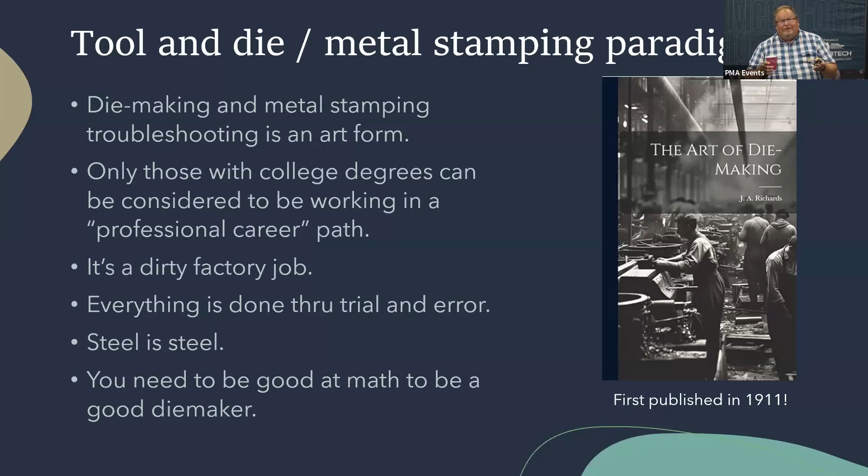It's a different world. The next paradigm: when I tell people I'm a die maker, they say, oh, you must be really good at math. And I go, no, not really — in fact, I'm quite poor at math. I think there's this perception that you've got to be super good with calculus or something to be a die maker. Yeah, of course I can do basic math, I hope. But I really doubt that even Danny Scheffler here has sat down and used a whole lot of calculus recently. But that paradigm is out there.

So here's the reality, not the perception, the reality. Tool and die designing, building, engineering is a science based on physics, based on an understanding of physics. Dr. Stuart Keeler, God rest his soul, made a statement one time at a conference. He said, when sheet metal meets physics, physics always wins. It's hard to defy physics, and he's absolutely right. To be a good tooling designer, engineer, process engineer, or even a good tool and die troubleshooter, you have to have at least fundamental, if not extensive, knowledge of material behavior.

It's not 1911 anymore, where we have 2 grades of steel, low carbon steel and thicker low carbon steel. You have to remember some of these paradigms were brought about as a product of history and tribal knowledge. Back when they made cars originally, they weren't concerned about fuel economy. If a part failed when you hit a tree, they just made it thicker out of the same stuff they made it out of before. They didn't care about mileage. And so all of these rules regarding die design, troubleshooting, were created and passed down from generation to generation to generation. Unfortunately, a lot of them haven't changed. Case in point, what kind of clearance do you put between the punch and the die when you're cutting?

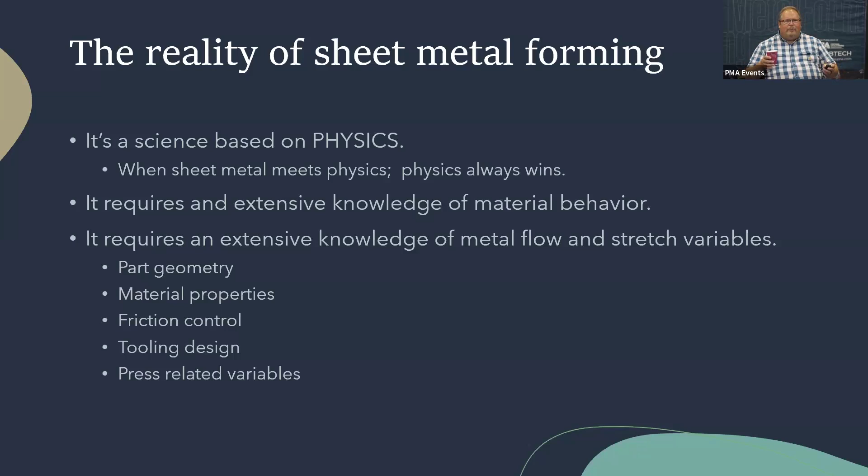It requires an extensive knowledge of metal flow and stretch variables, part geometry. How does part geometry affect formability? How do the material properties affect it? Friction control - we have to understand tribology, which is just the science of friction, if you don't know that. We have to understand tooling design and press related variables, and understand what role the press makes. I love to say, as it pertains to sheet metal stamping, the press is just as important as the die. I can build a jewel of a tool, with an accuracy that's unheard of, but if I put it into a glorified 250-ton trash compactor, I'm going to have issues. So we have to understand the entire stamping system - the material, the press, the feeder, the lubricant, the tool steel type - all of it fits together and everyone's a variable. So we have to have a pretty good understanding of how it all works together.

Very simply, as I've stated, this ain't Kansas anymore, Dorothy. So if you're still using the same stuff that you used 20, 30 years ago, you might want to do a little research and educate yourself regarding how the industry's changed. For example, the Tin Man is no longer made of tin. He's lighter, faster, and stronger than he's ever been. He's made out of high strength, low alloy, 80 XLF, dual phase 1100 material, martensitic steel, some certain grades of bake hardenable body panel aluminum and super alloys.

He's got titanium joints and Inconel inserts in his back. And he's completely crafted differently than he was 30, 40 years ago. He is crafted using lasers and water jets and CNC high-speed machines that do hard cutting. Parts of his body are 3D printed, and the presses that stamp out his arms are high-tech, servo drive, ultra precision presses with parallelism and stroke lengths that are ultra precision. It's not 1911 and it's not an art form. So we have to shift our paradigm and look at it completely different.

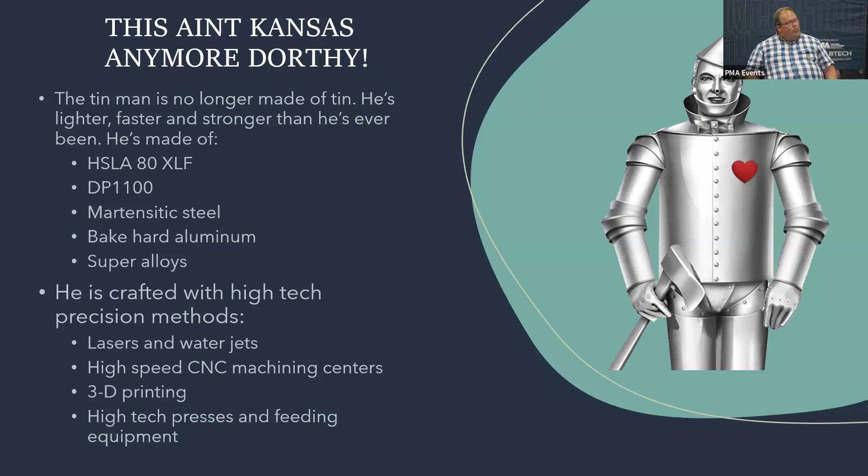And so, we got to look at things a little bit different, and we have to understand that difference. And how do we do that? We shift our paradigm, stop making die makers, stop making die makers and press technicians, and start making diologists.

Now, there is no such thing as a diologist. That's a term I came up with. I named my company Diology because I firmly believe that the process of designing and building a die and stamping process is a science. So I thought diologist was a perfect fit.

What separates a diologist from any other type of tooling specialist? A diologist is an individual that makes decisions based on an understanding of the physical behavior of sheet material and also uses data. I'm not going to make decisions because it worked last time, because that's the way we always do it, or because I had success back in 1984 with a part that looks similar to it. I'm going to make decisions because I understand the physics that supports that decision.

And if I don't understand it, I'm going to try my best to understand. Does that mean a diologist always has the solution based on physics? Heck no. I can't tell you how many times I've stood out by a press, scratching my head, going, I just don't know what's going on here. I think if anybody's honest with themselves, every panelist out here has gone, this one stumped me. But eventually we get there through the application of physics.

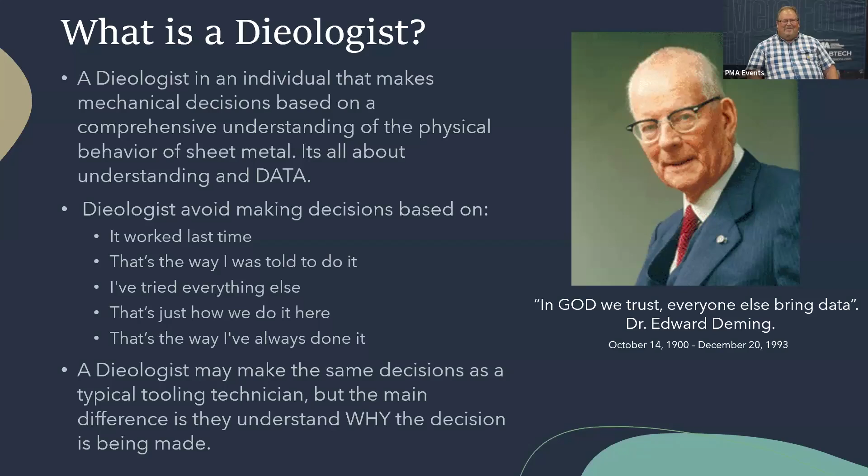So eventually they'd come back and say, okay, I'm going to increase the radius at the entry. It's going to reduce the friction, which will allow more material to feed in, reducing the strain at the top of the part, reducing the probability of splitting. Then I'd smile and say, thank you, knock yourself out. Okay, that's all I wanted.

Okay, so I've only got a short period of time here, and quite honestly my watch stopped working, so I don't even know what time I have here. But I kind of put together some courses that I think are very important to become a diologist, as well as on the floor experience. Okay, number one, shop floor communication and leadership.

I think it's so important that we have an understanding of how to communicate and get people to work together as a team. I rely on different paradigms. Sometimes the solution to a problem is so simple you don't think of it, because you've trained your brain to think at advanced levels, and you don't see something as simple as a rag clamped on the die in the press. So you need people with different levels of experience bringing different ideas and concepts to the table, and then you can come up with a solution.

That's what consulting is. A lot of people think a consultant is somebody that comes into their company and tells them how to fix stuff. Like a blind squirrel that gets an acorn once in a while, sometimes that happens, but more often than not it's a group effort - coming in, getting people together as a team, collecting data, and as a team finding a probable cause or solution for that problem. But it takes a good ability to communicate with individuals and instill passion about what they do. I think it's very, very important.

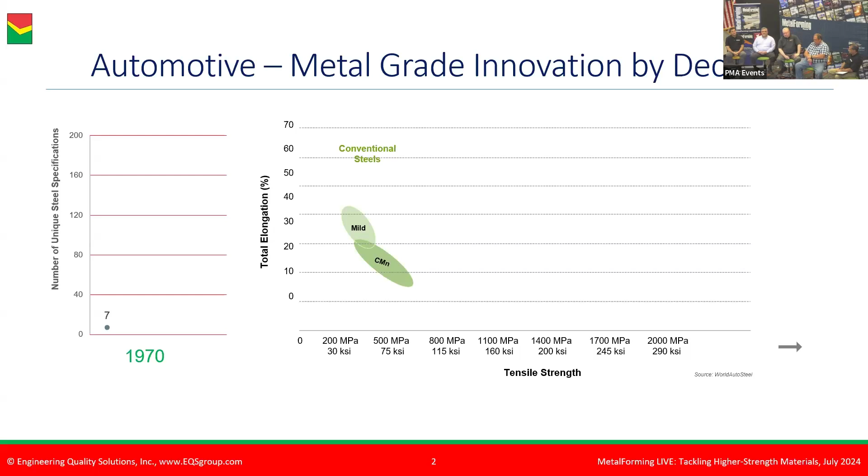Relative to the automotive industry, there were 7 unique sheet metal specifications where these 2 grade families came out of. Fast forward 30 years to the 2000s, where it's not 7 unique automotive sheet steel specifications anymore, but over 100. We have a plethora of new grades in the steel family—that's when the first generation of advanced high strength steels were commercially released. We also saw automotive applications of sheet aluminum alloys as well as stainless alloys.

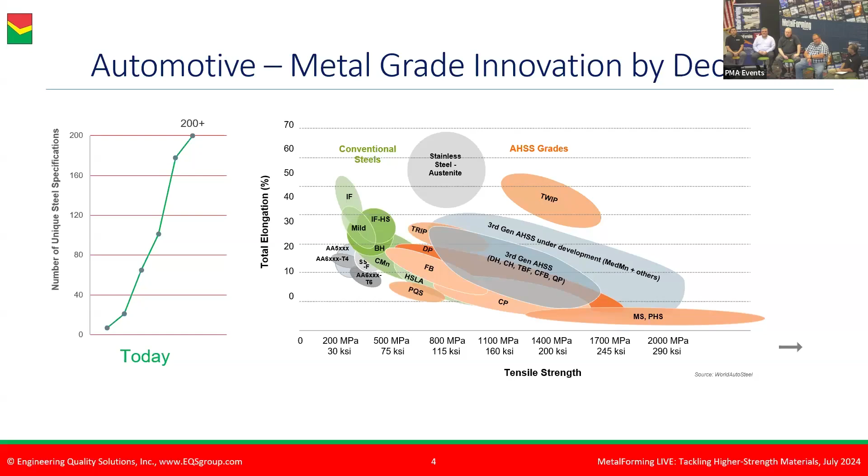What about today? There are over 200 unique sheet steel specifications for the automotive industry alone. We have more than just the first generation of advanced high strength steels—you may have heard we're up to the 3rd generation now. Lots of different options are available to manufacturing companies. But the uniqueness of these advanced high strength steels is that they're no longer basic commodities. They're actually highly engineered products that change in characteristics depending on which company and which location manufactures those products.

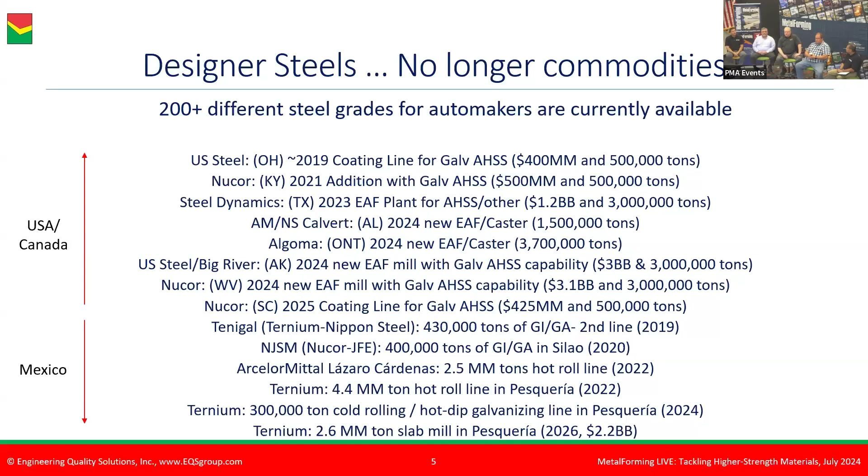These advanced high-strength steels are going to mean some changes to manufacturing processes. Even the most basic advanced high-strength steel that's been commercially available for more than 20 years now, dual phase 600, that's going to take an additional 20–30% of blank holder force. Hopefully you're going to have a way to apply that if you've been sourced on a part made out of this most basic advanced high-strength steel.

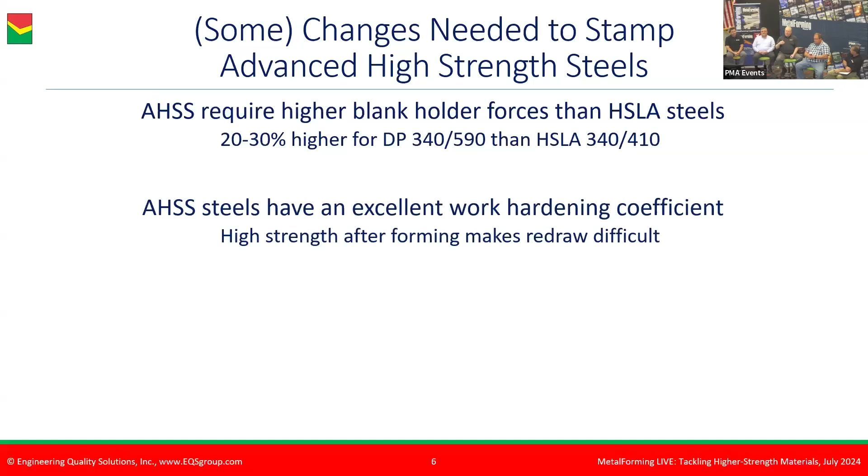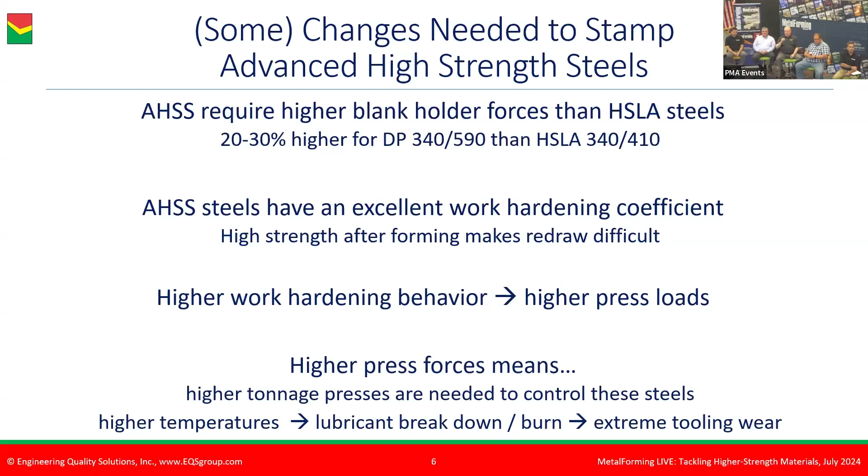One of the characteristics of all of these advanced high-strength steels is that they work harden to a very strong degree, literally and figuratively. That means as you're forming these higher strength products, they become even stronger. That has certain implications, because if you're dealing with a higher strength product that becomes even stronger when you're forming it, you're going to generate increased press loads, which means your press has to have the necessary tonnage capability. But you'll also see additional temperature, even though you're only doing room temperature stamping—these forming processes will increase in temperature, leading to the potential for lubricant burn-off, which increases tool wear.

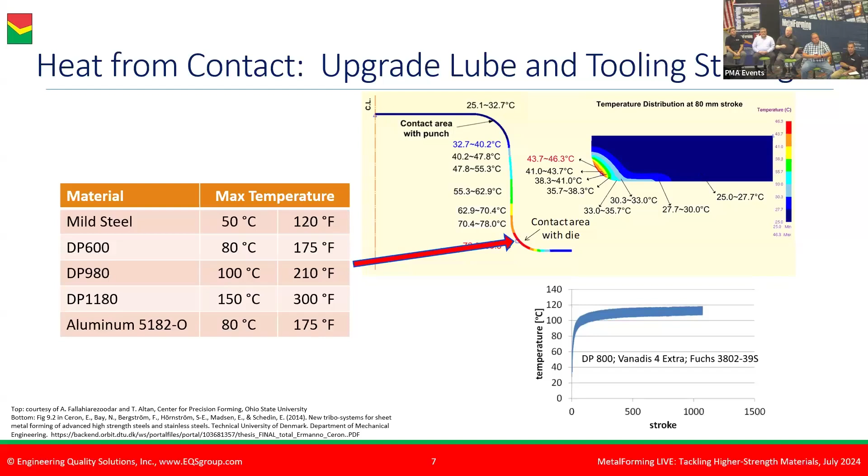As an example, based on a simulation but verified with actual temperature measurements for room temperature stamping, the friction from the contact of sheet metal with the punch and die material, for mild steel, heats up the sheet steel to 120 degrees Fahrenheit. Our lubricants are designed for that. But if we swap in higher and higher strength steels, we're not at 120 degrees Fahrenheit anymore—we're up to potentially 300 degrees Fahrenheit, depending on strength. If you are not using a lubricant designed to have the additives functional at those temperatures, you're going to run into problems with additional tooling wear.

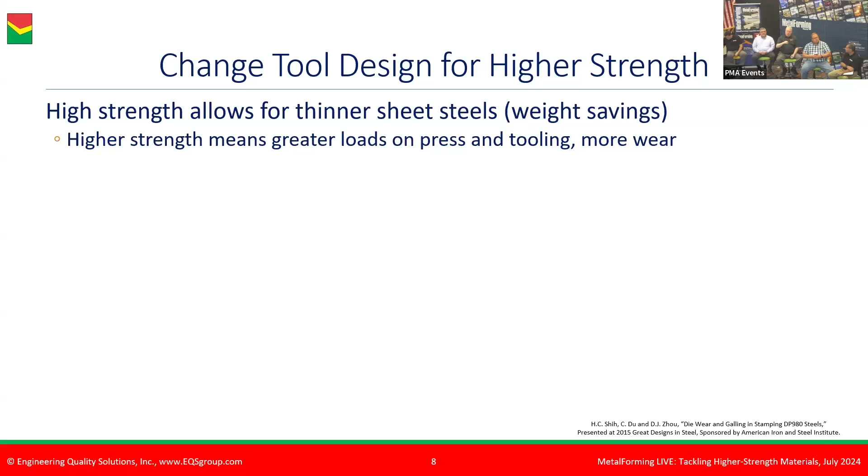So we also need to keep that in mind and change our tool design approach as we start working with higher strength materials—higher strength steels, aluminum, and stainless grades. Those higher strengths allow for a thickness reduction, which is great because that could lead to potential savings. But higher strength means increased press loads and potentially increased tooling wear. Because we're dealing with thinner metals that are now higher in strength, we have a greater risk of tooling wear, since these products are more prone to wrinkling. It's prone to wrinkling because they're thinner, but also we hopefully have enough tonnage to hold it back in the binder.

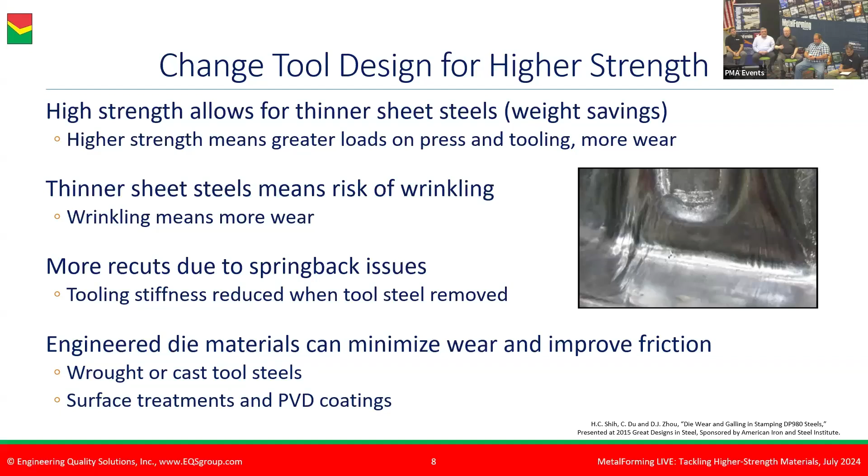One of the challenges with these higher strength steels is an increased degree of spring back. That's certainly the case if you switch to an aluminum product, but also in general, higher strength steels have greater spring back than lower strength steels. That means you have the risk of tooling recuts when trying to do your tooling development to account for that. If we recut these materials too much, we now have the risk of our tool not being sufficiently stiff, so we need to account for that. The tooling material we use needs to be upgraded from our older strategy when considering that we're now dealing with higher strength metals, and the products are out there.

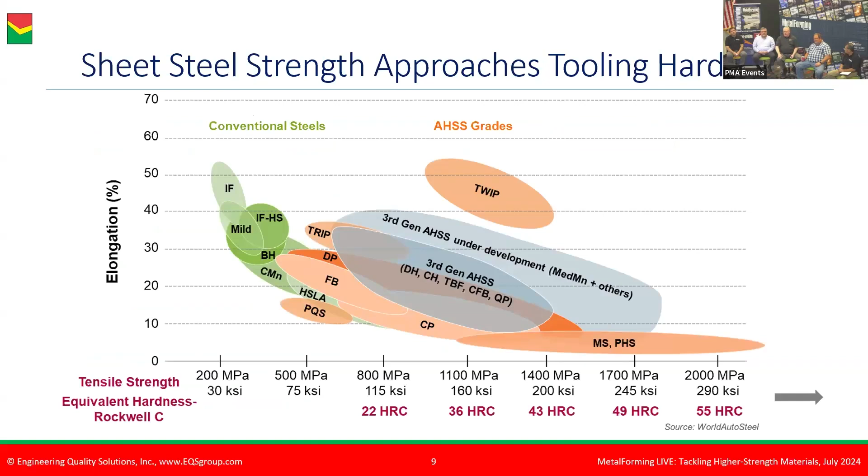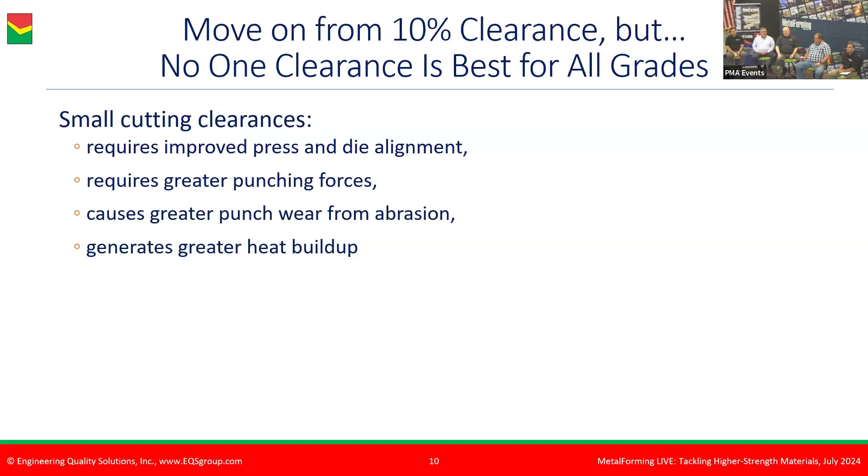Art also alluded to clearances, that 10% paradigm that we grew up with. Well, that probably worked well, and it did work well for mild steels. We've got decades of evidence to show that, but that's not necessarily the case as we go to higher strength products.

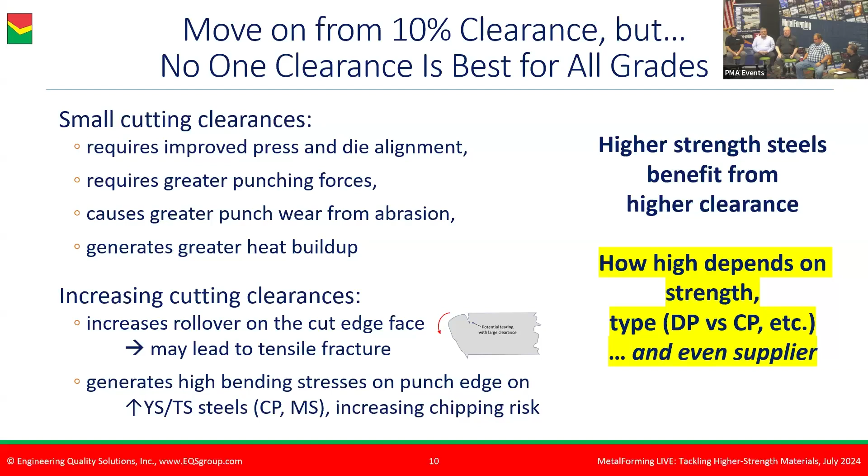For higher strength steels, we know we should be increasing that clearance above 10%. However, how high that clearance should actually be is a function not just of the strength level of the material, but also the type, be it a dual phase steel or a complex phase steel, which will behave differently in your process. In addition, it's going to be a function of the supplier who's providing that particular advanced high strength steel to you.

That, for many years, has been one of the downsides or challenges with metal forming simulation. But it's gotten to the point where simulation can fairly accurately predict your dimensional concerns, but you need to capture Young's modulus accurately. Now, if you've played in this space, you know Young's modulus of steel is 210, maybe 207 gigapascals. That's what we've been trained to think. Well, there is some variation based on grade, but that 207 gigapascal is for the sheet metal you get from your supplier.

But recent understanding is that as the metal is being formed, the modulus decreases, and for some grades it decreases by 25% as you're forming it. If you cannot capture that in your simulation, you're not going to have the opportunity to predict your dimensional control to sufficient accuracy. But there are software packages that can accommodate those changes, and there's evidence that this has a dramatic improvement on the ability to predict dimensional precision.

Here's Vince to talk about how Martinrea handles higher strength materials.

Vince: Thank you for letting me have the opportunity to show you some of the recent activities and technologies we're deploying to make sure we have a good understanding of the die system, the stamping tool, the simulations, and the press.

This is a chart coming out of one of our modern presses, modern tonnage monitors. It's four corners of data—you see four individual curves. It's a measure of the strain during a single stroke of a high strength steel, and you can see different loads over the press stroke on each of the corners.

A lot of the times one of the paradigms is you look at the tonnage monitor and it says 400 tons, and if you're in a 600-ton press, that's about as far as you need to go with your tonnage evaluations. But with some of the materials and presses we're looking at, the dollar signs—the number of zeros for the decisions we're making—are getting so large, you have to pay attention to it. It's big dollars.

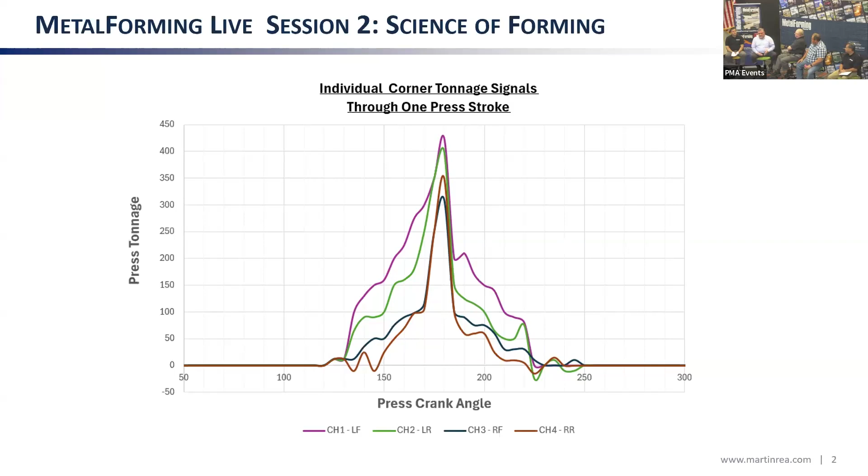So one of the things we're doing is taking a look at how much information is available. This is something you can go home today, go back to your press shop, and look at one of your modern presses to get this information. Hopefully what I can show is how you can make better decisions, knowing this information is available to you today.

One of the visuals that you can take out of this data, looking at the left front corner and the right rear corner, you can isolate those two curves, and you can see that it creates a very large torque on the press.

So even though you have a very high-tech, high-strength piece of equipment, you can see by some of the curves you get off the press, hey, we're abusing that piece of equipment, and if we don't want the maintenance problems coming with tools being out of line or presses being overloaded, this is one specific chart that can show there's an obvious problem. We're trying to bend the press, and we can do better than that.

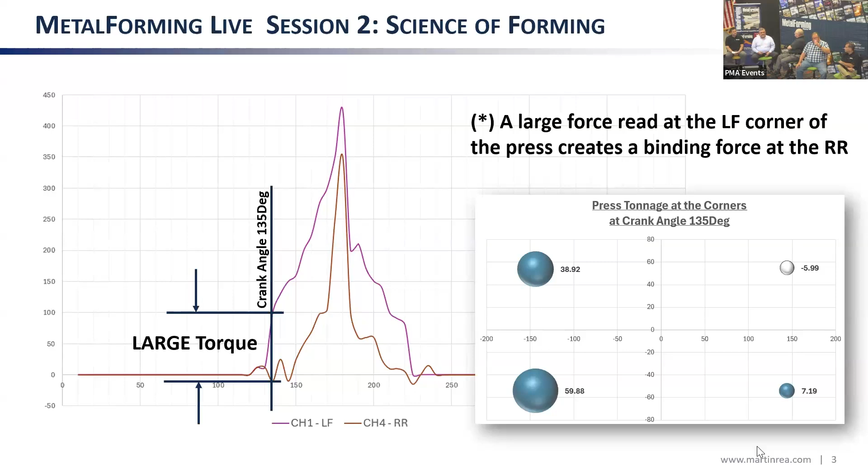When you look at the press tonnage curves from manufacturers, what they give you is: our press is worth 3,000 tons at bottom if the load is being applied at the center of the press. It's quite obvious by some of the positions of the dots on this diagram that loads are being applied outside of 0,0, and we need to be cognizant of the load placement on the bolster, and how high up in the press stroke that load is being applied.

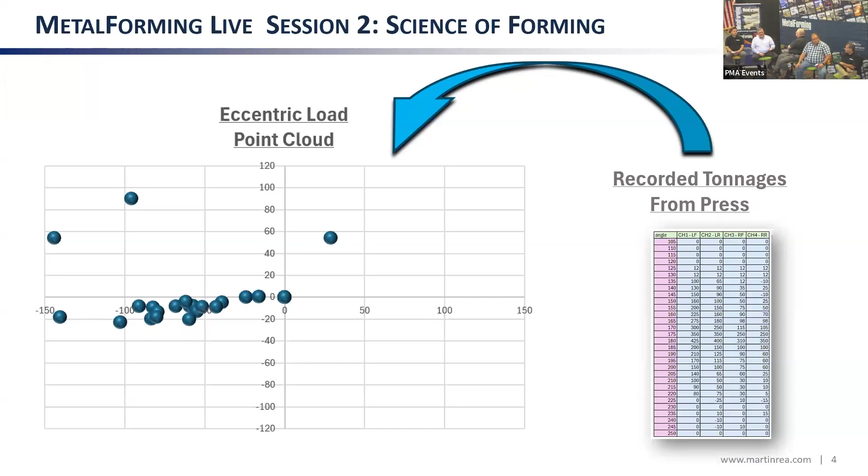When we take those same press curves, the blue dots were a static look at that press stroke. The animation I'll play is watching the centroid of the load move around on the bolster.

If we take a look, there'll be a dark green dot showing the current position, and then two different shades of lighter green following it, to give you an idea of the motion of the load on the bolster. When the dots change color to brown, that's when the die is on bottom. So you can see that even when the tool is on bottom, the centroid of the press force is not necessarily at the center of the press, and it's not necessarily stagnant.

The green dots are in play after the die makes contact with the blank holder, and you can see the load start off in this transfer press very far to the left on the feed side of the press, and you can see the load transfer.

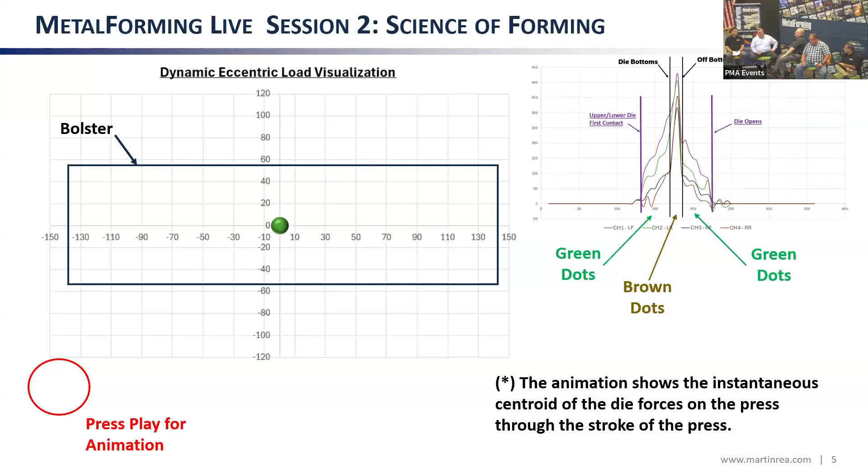On this chart, the animation tells the exact same story, but in its place on the bolster, it shows a representation of the press capacity. As the dot moves away from center, you can get a feeling for how a 3,000 ton press can very easily be only worth 1,500 tons with the load far to the left or right, or front to back. It gives you an indication of how much the press capacity drops during the stroke. You can see by the motion of the dots over the bolster, you get an idea of the magnitude that the capacity of that press is not necessarily 3,000 tons.

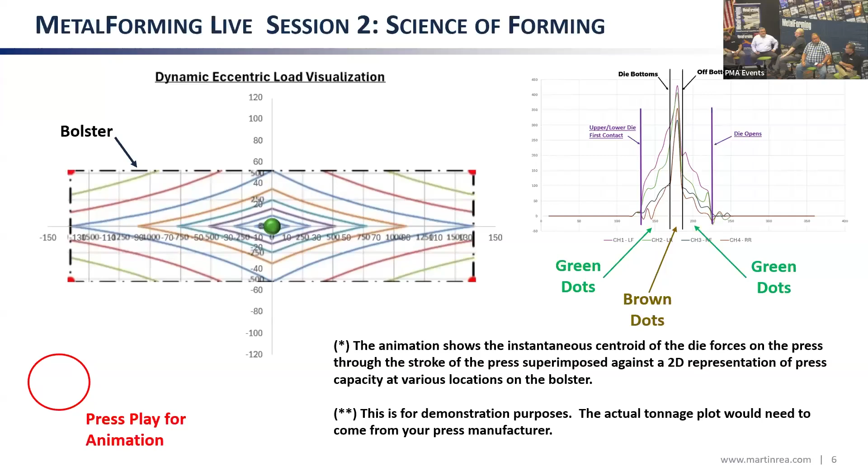I think for the duration of the press or the die working, the load is anything but on the center line of the press. As material strengths get higher and higher, it seems like it can turn into a vicious cycle where the simulations are saying you're needing more and more force. We have a couple of slides that can show you the magnitude of some of this information, how we design in a lot of our tonnage.

This particular graph, I'm really hoping to show a concept of four-dimensional press tonnage that I think we need to start looking at as we look at higher and higher strength steels. When we say we're in a 3,000 ton press, it's easy to say, well, we're only exerting 1,000 tons, we got to be safe, but we're exerting 1,000 tons in an eccentric manner that can easily cock the ram on the press and abuse it through every stroke of its cycle.

What I'm trying to show in terms of 4-dimensional is that a component of that force has both a left-to-right and front-to-back movement as it moves around on the bolster, just like we saw in the animations. It also has a Z component - when we first see the first forces on the press, we're contacting nitrogen that could have 4, 5, 6 inches of travel, so there's an X, Y, Z component to that force. We really need to understand if our machines are capable in that X, Y, and Z. The 4th dimension is really time.

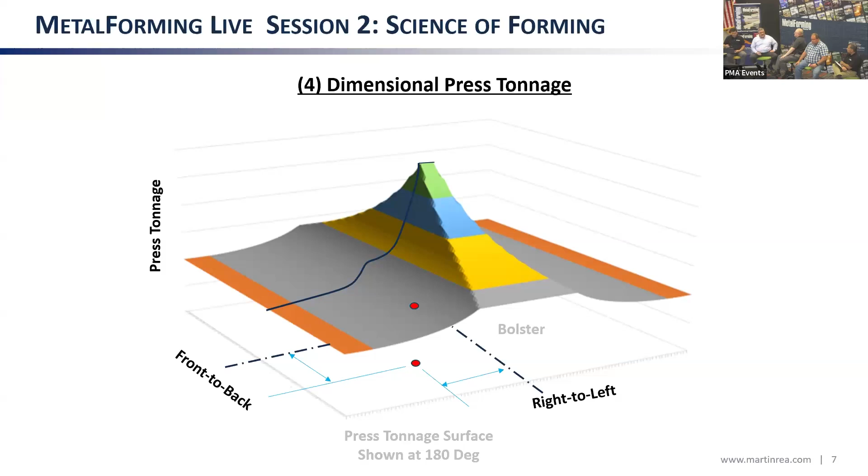This is a tonnage reading - 4 tonnage readings on a B pillar. The 4 tonnages in this graph are with and without sheet metal in the die. Those are represented by the 2 lighter curves, and then with and without the bottoming blocks. We all know that when the die's on bottom, you have to have it all solid to the press - we know it induces tonnage on the press. That's things we live with.

But do we really go through and understand if it's really doing everything we say it is for quality? If we take a look at just the light curves, the light green and light blue, that's without material in it. What that really shows is the area under those two light green and light blue curves is the energy it takes to actually form the die you designed with the inputs from the forming simulations.

In the very low left-hand corner of the curve, you can see a change in the light and dark, and you can actually see the draw beads being set, and further up on the graph shows the forming of the part. So you can see how much force our simulations are telling us we need to form a part.

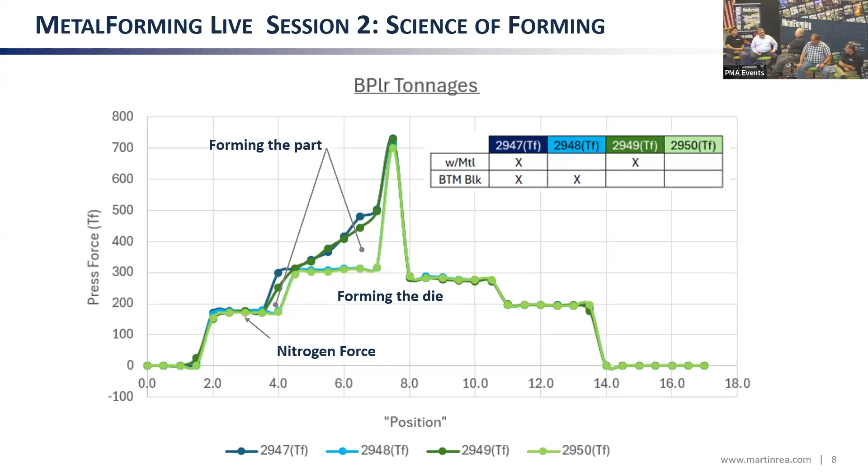But when you take one step back, and we have a tonnage problem - is it a tonnage problem to form the part, or a tonnage problem to form the die with all of the current paradigms we have in it? We really have to take a look at the forming simulations we've been talking about. We can look at that in these curves.

The forming, the light blue box that has the 'predictable' label on it, is really the limitations of the simulation tools today. During the press stroke in the simulation world, the simulation stops when the relative movement between the upper and lower tool stops - that's when the die bottoms. In the predictable box, the far right edge is when the die bottoms.

And that is what you can predict from the forming simulations. The less predictable box is actually the tribal knowledge box - it's what ran good last time, the result of all the shims, the result of what quality said they needed, but it's self-inflicted. The forming stopped a long time ago, and now it's just how much do you want to stretch your press and compress the die to make up for bad spotting in the tools, make up for coil to coil changes. That's really where the tribal knowledge is - how much tonnage do you really want to apply to make up for all the other variables that are on deck.

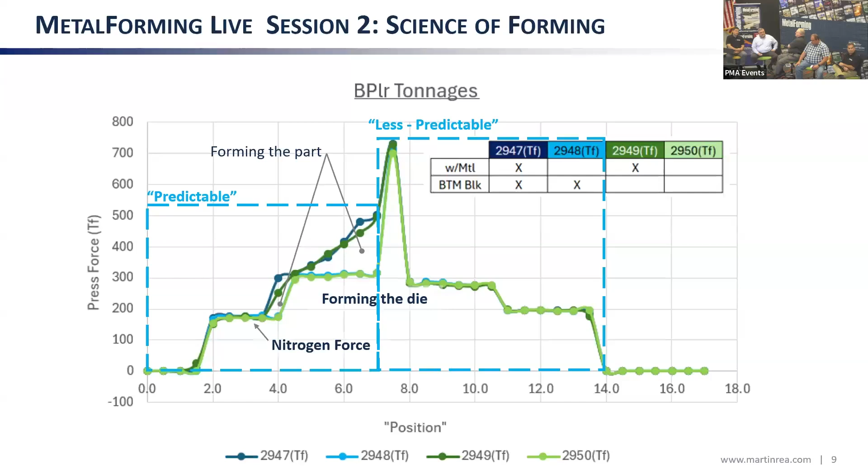In terms of - I forgot who mentioned it - we tried everything. Did you try, you know, it's always good - I always hear 'I'd rather have too many than too little.' Yeah, I get it, I'm from the same school, but did you try running them on half of the nitrogen that you designed in there?

By and large, the tonnage problem you'd have with this panel isn't because it takes that much tonnage to form - it takes that much tonnage because that's what's designed in from the software, and the paradigms that went into those original studies might not have been based on these types of steels. Continuous improvement is what we need to concentrate on, driving the synergy between the press, the die, the simulations, and the customer's needs. Physics wins when you hit it - physics wins - and there's only so much press you can really afford in your stamping plants. When you get into bigger panels and higher strength steels, it's not like if you designed it for the 4,000 ton press, you've got a spare 6,000 ton press out back.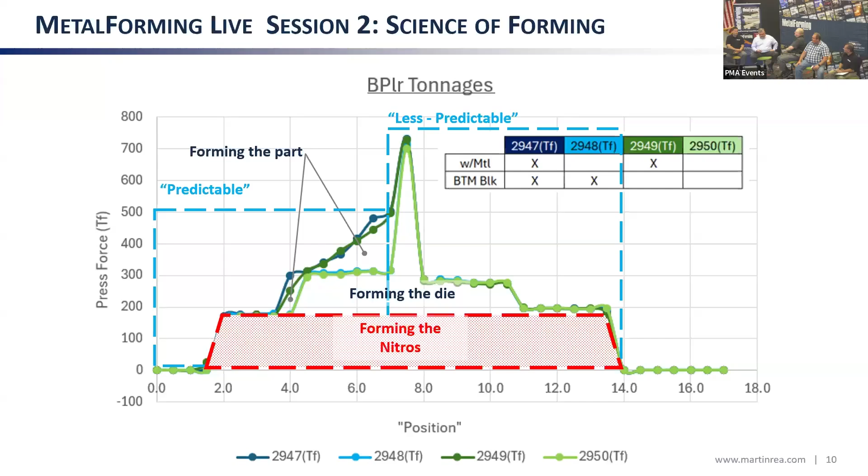My wife says sometimes I need to read the directions. This is one of the cases where, when your margins of error are so small, you really have to look at the whole system together and make informed decisions. I really appreciate the opportunity to share those quick slides with you, and hopefully show you some things where you can go home today, look at the press strokes you have, and see if there's room for optimization.

Well, thank you, Vince. We do have a couple questions. One deals with earlier in the presentation with the load centroids - how can the load centroids be outside of the bolster? How far from the press center are the connecting rods? It seems as if some of the centroids may even be outside of the connecting rods.

They are, and that's what makes the challenge even greater - understanding that if your centroid load is outside the linkages of the press, you're really just trying to bend the ram around them. And then you wonder why you have to buy repair kits and linkage parts. That's a really good question, I'm glad for that.

These centroids of the load, when you look at it in terms of tilting - one of the first hits is the ram actually cocks in the gibs, and you have large positive downward forces, and on one corner of the press you have a negative upward force because it's sticking. That really throws the visualization off, because given that loading scenario, the centroid of the load as seen by the ram is outside of the workspace of the die. You should definitely be adding a counterbalancing cylinder, something to shift the dies in the press, something to move that particular motion of the ram - you'll get a lot more life out of the parts that are already in the press.